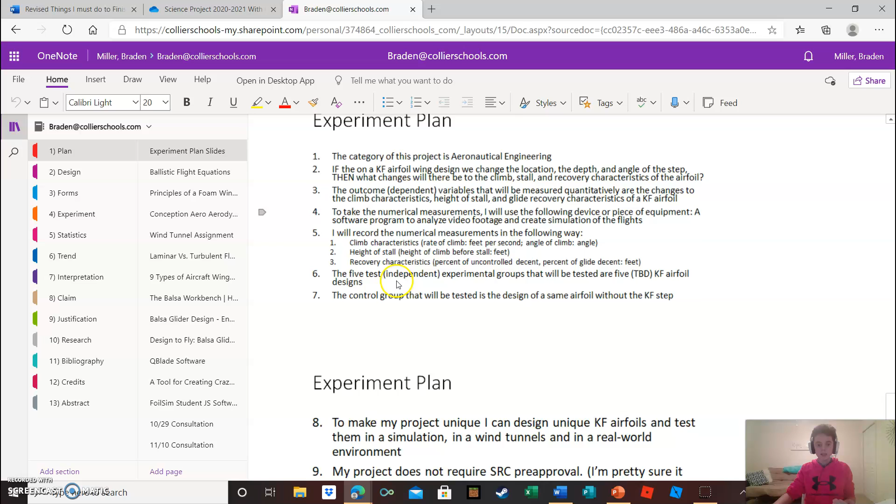This is my digital notebook, which I have - obviously phase 1, which are these slides. These slides were based off a template, and these are the ones that I actually have in my PowerPoint, which I'll be showing you later.

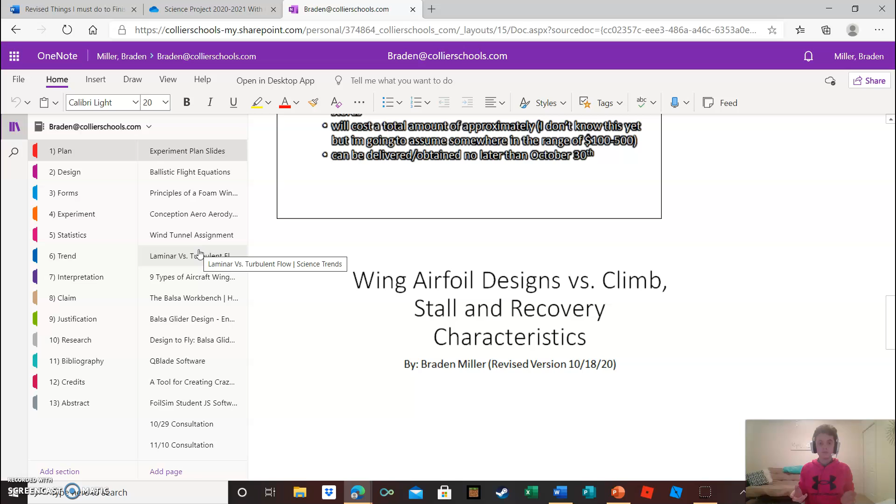These are all the OneNote web clippings, which I clipped from the web to support and research into my experiments more. So these are always helpful - they give me a lot of insight into airfoils, how they work, KF airfoils, what I'm researching right now, and previous experiments that scientists have done.

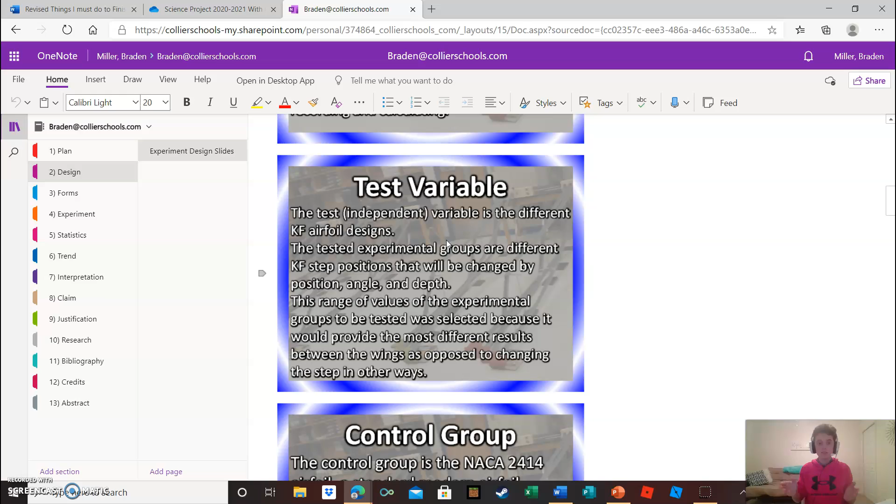My project design slides basically outline my experiment and everything that's going to be included in it, how my procedures are going to be done, and my forms, which I've submitted. The only thing I have not submitted is the abstract, which I'm actually going to do tonight.

This is Form 1A, Form 1B, blah, blah, blah - lots of stuff I don't think you'd be too interested in.

Alright, on to my PowerPoint. I'll start it as a slideshow. Give it a bit to load.

Yes, my project is titled - Wing Airfoil Designs versus Climb, Stall, and Recovery Characteristics, by, of course, me.

A lot of my slides aren't just going to be reading off directly what it says, as that would be boring and time consuming, and I don't think you judges would want to sit through a person just reading off their slides. So I'm going to elaborate on what my slides truly mean and what I'm going to do to get through this project and finish it by the 25th.

My experiment plan names my name and my class period. Whoa, hit the scroll wheel.

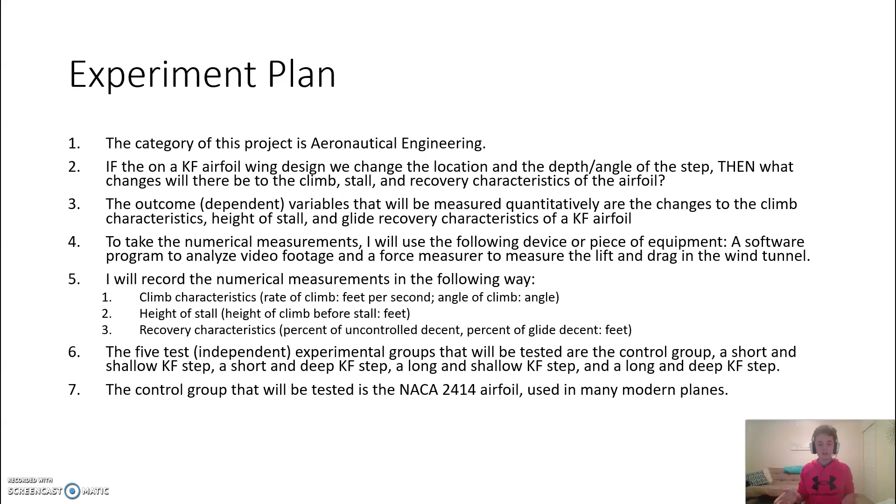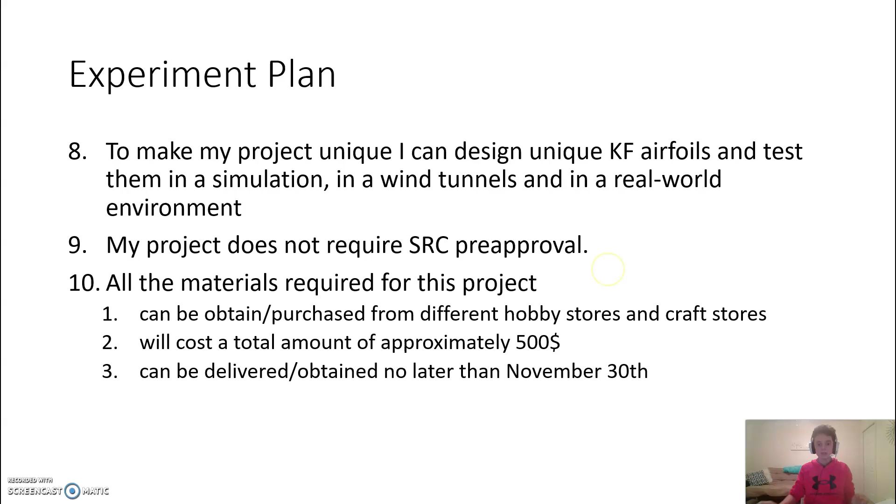It's always going to be experiment plan. Category of this project is aeronautical engineering, which is what I'm researching. My project problem, how I'm going to record the measurements, and my independent variables - it's all a lot of technical stuff that I have to list, but it's good to list, as if you don't, your experiment will get invalidated. My project can have all the materials, doesn't require SRC approval, blah blah blah.

Alright, on to my real experiment - this is the meaty juicy stuff. My topic problem is, if the KF wing different design ideas alters, then will that cause the flight characteristics and stall recovery to increase, decrease, or have no change?

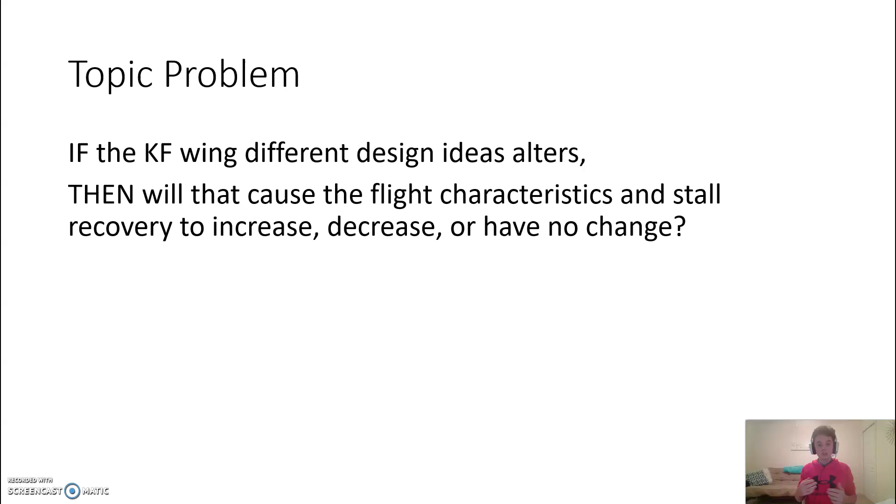Now, what I mean by this is KF airfoils are airfoils, except - see if I can point this out - they have a step in it which vortex, or airflow, builds up that allows for much smoother, more laminar airflow across the top of the wing. If you have just all metal there, then there's going to be some turbulent airflow that could cause drag and decrease lift for the airfoil.

My hypothesis is basically that if I use the different KF airfoil wing designs, then they will all improve quantitatively over the control group, which is a NACA 2414 standard airfoil that is used on modern airplanes, and there will be less drag and more lift.

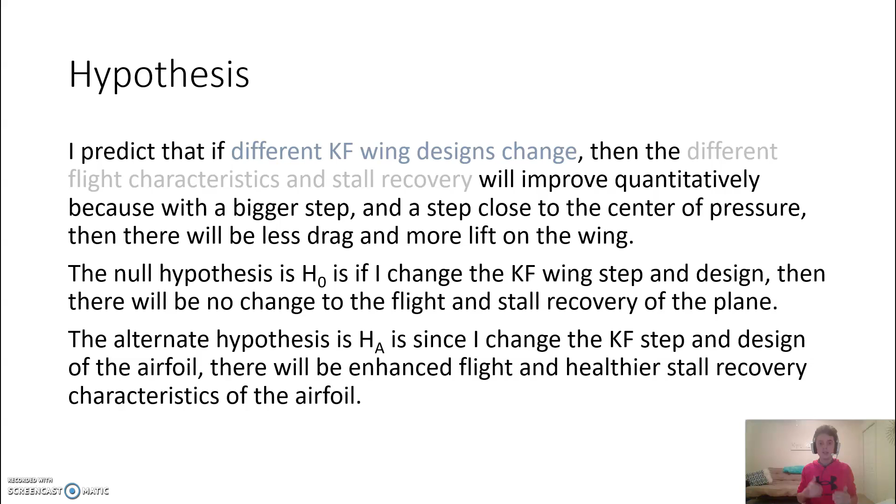My null hypothesis, which is something I want to disprove, is that when I change the KF wing step and design, there will be no change. The alternate hypothesis, which is what I want to prove, is that if I change the KF step and design, there will be enhanced flight and healthier stall recovery characteristics of the airfoil. The null hypothesis and alternate hypothesis are essential in all experiments, as they're something you aim to disprove and prove, and that's what I plan to do.

My outcome variable in this experiment is the flight characteristics and stall recovery of the wing designs. Flight characteristics would be how smooth it flies through the air, measured qualitatively, but there is a way to measure it quantitatively by how fast it ascends and if it ever stalls out or not.

The other variable I'm testing is the stall recovery. These would be two separate things, not combined. Stall recovery would be tested by it going up, intentionally stalling to see how well it recovers.

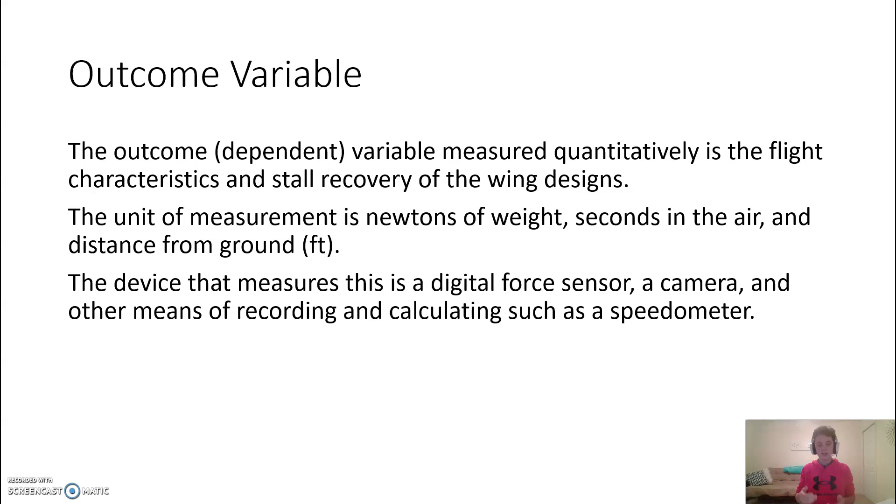Unit of measurements is newtons of weight, which would be in the wind tunnel, seconds in the air, and distance from the ground. Device that measures it is a digital force sensor, a camera, and speedometer. Basic stuff.

The test variable would be the different KF airfoil designs, as I've discussed. When I went through this, I actually plan to change it in three ways: the position, which would mean how far it is from the front and back; the angle, at which the step occurs; and the depth of the step.

Later in my experiment, I realized that the angle of the step would not really matter, as a foam piece this thick would not really matter if its angle was 45 degrees or 90 degrees.

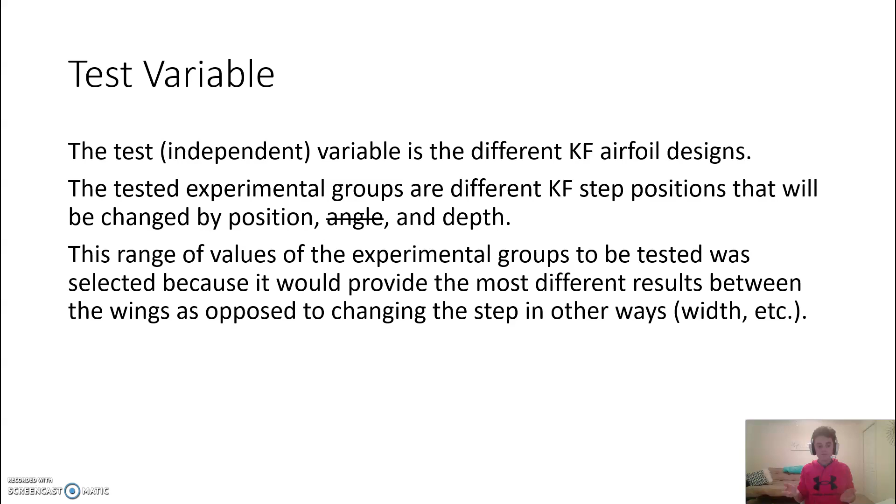The range of values in my experimental groups to be tested was selected because it would provide the most different results between the wings, as opposed to changing the step in other ways, such as width - width would be how wide the step would be. It really is a lot of needed stuff.

Control group, as I've already discussed, is the NACA 2414, which is used on a lot of standard modern airplanes that you, me, and a lot of other people ride on every day.

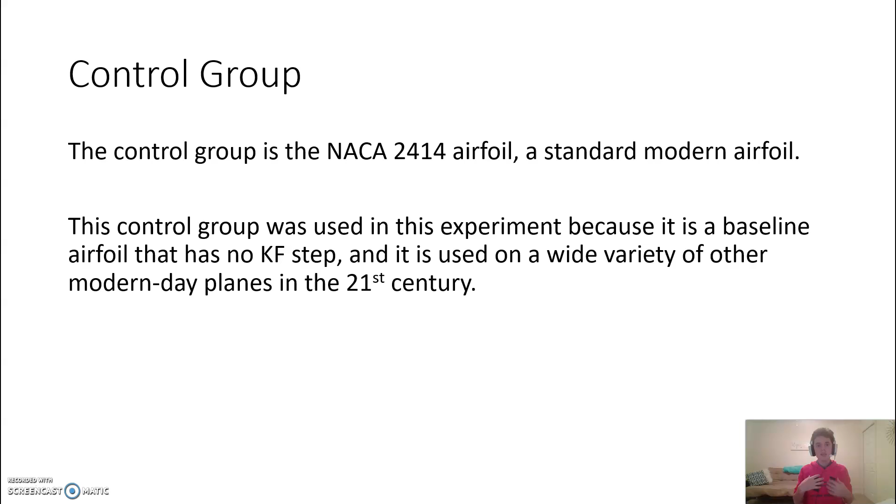My controlled variables in the experiment are the fuselage, which would be used for the flying of the plane, the design and shape of the wind tunnel, measuring devices to use, the materials the wing are built out of - that would be foam - and how the wings attach to the fuselage, the time spent in the wind tunnel, and the way the planes launch. Again, you see that the software I use to simulate is crossed out.

Realized down the road that a lot of the software I wanted to get was either too complicated, too simple, or too expensive. I researched software and found options for $400, $500, and as a kid I could not spend that, nor could my parents, so I had to cross out software simulations for airfoils.

The simple ones that were free did not get the results I wanted, such as graphs and other data.

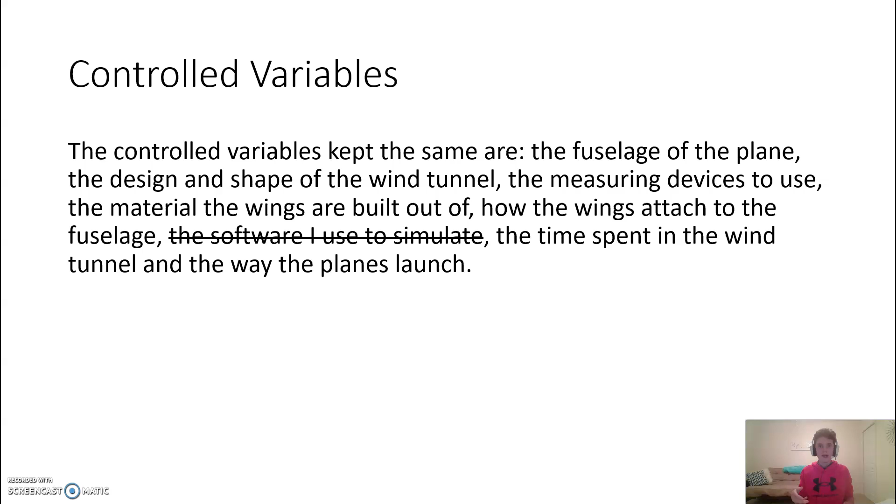Materials, these aren't really that important, but: balsa wood, cardboard, plexiglass, fan, normal wood, launcher for the airplanes, paper, force sensor, measuring sticks, and no safety equipment needed. Software for simulating is crossed out since I didn't end up using it.

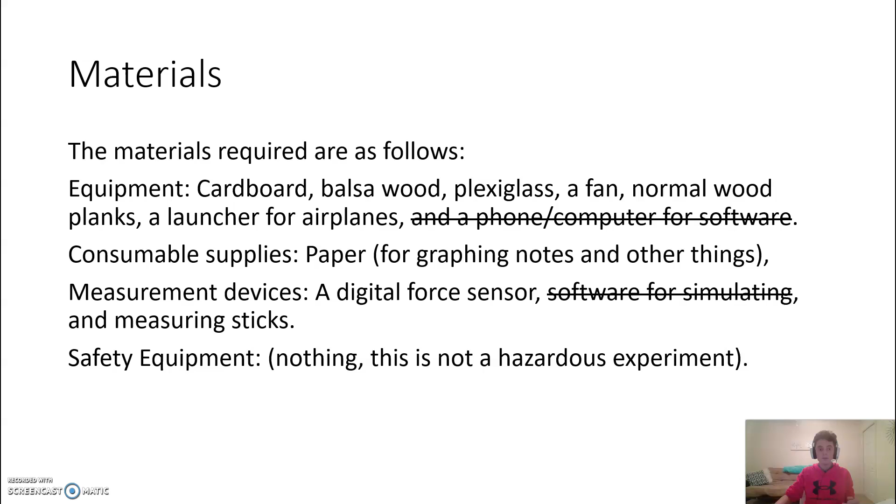Procedures and photos. I'm not going to read through all of this since it's a lot of boring stuff, but I have to include it, naming the specifics of what I'm actually doing in my experiment is very important. Feel free to pause my video here and read through everything yourself, down to the nitty-gritty details of what I have to do.

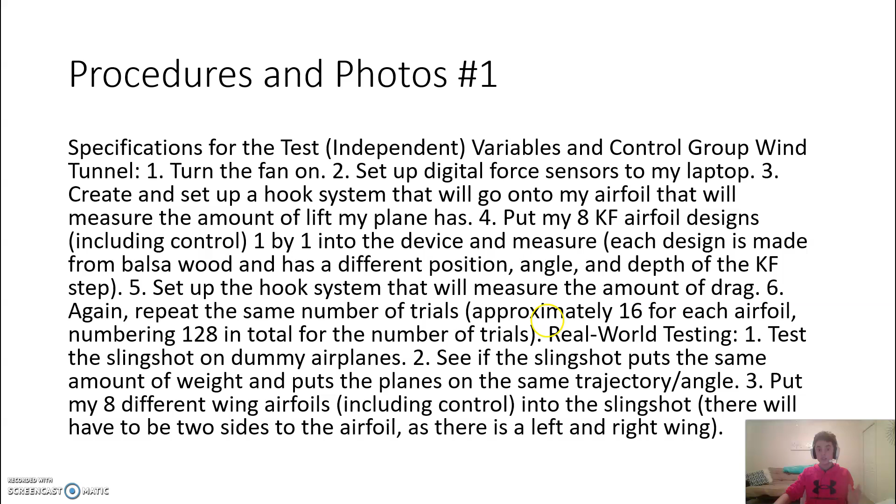So there are 4 slides of procedures and photos. One, two, giving you some time to pause it, three, and four.

These all list my experiment from start to finish, what I actually have to do for simulations, which I'm not doing, so ignore the simulations part, the wind tunnel, and the real world testing. You might also be asking, how would you do the real world testing?

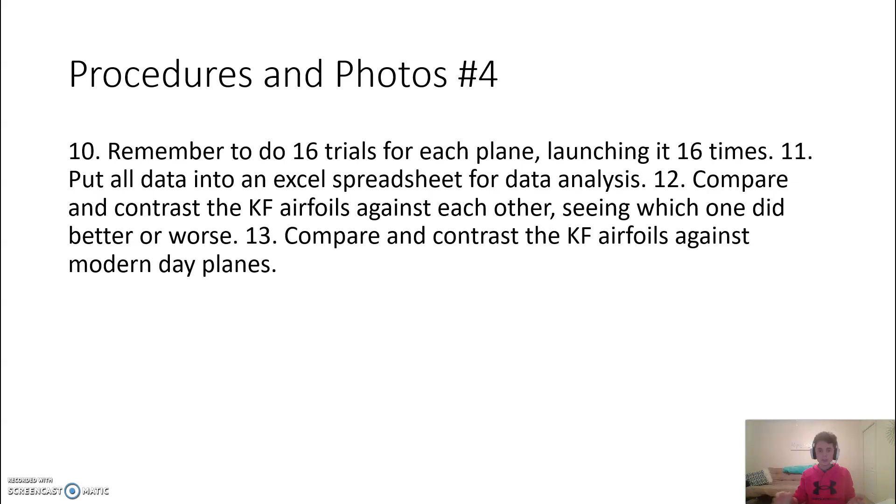I use a slingshot that can launch the airfoils or airplanes at the same speed each time, so it's not me throwing it. That would be invalid and definitely not a controlled test.

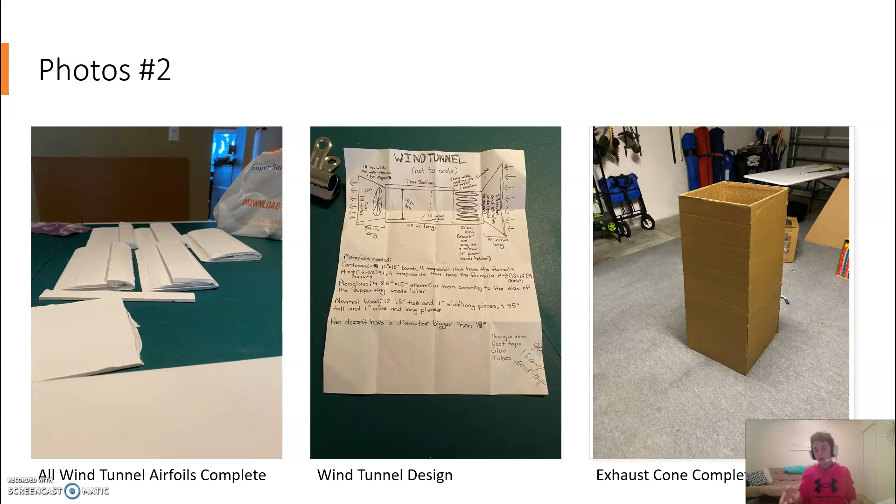All my wind tunnel airfoils, the smaller 4-inch versions, were complete by this point, about late October. This is my wind tunnel design and my exhaust cone, which definitely took a while.

It's springs that can go out and retract. The laminar section is how the wind flow actually gets laminarized. If the wind flow is not laminarized and is turbulent, then the testing I'm doing in the wind tunnel will not work, because the wind is just going chaotic.

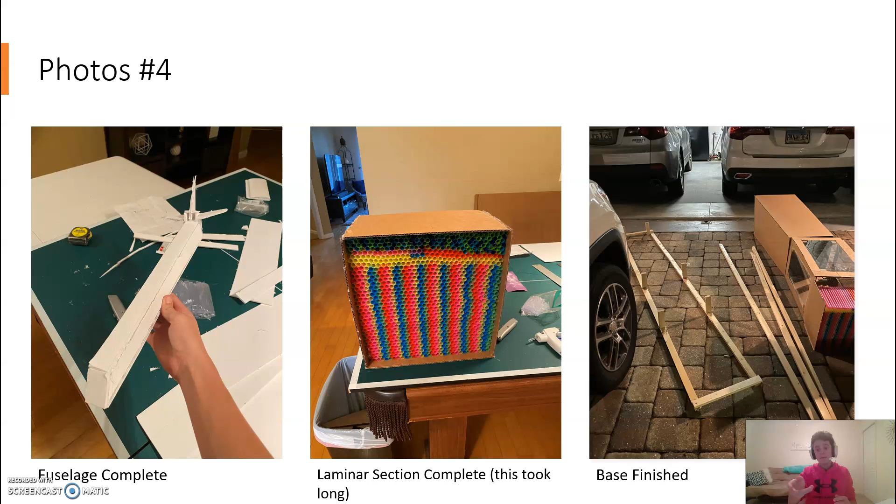My base for actually holding up my wind tunnel and putting it together, and finally, my finished wind tunnel.

My slingshot is still in progress. I've drilled a hole at the front to hold the springs in place, and all I have to do is test it to see the same wind speed as I'll use in this finished wind tunnel, which has an anemometer to change the wind speed.

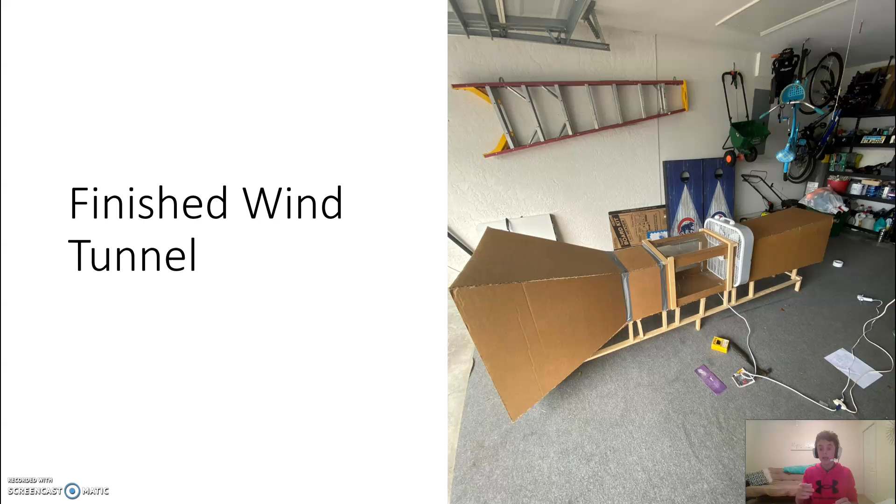And that's it, I believe that is everything for my project, besides maybe my bibliography, which has all my sources, basically just clipped from here, not here, here.